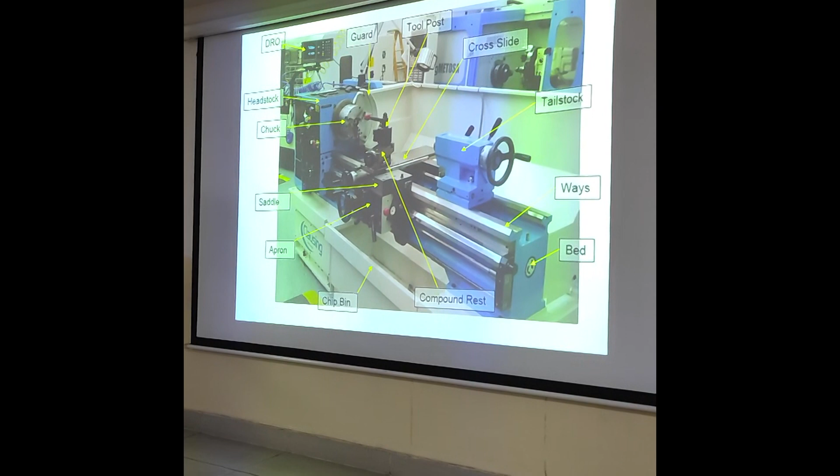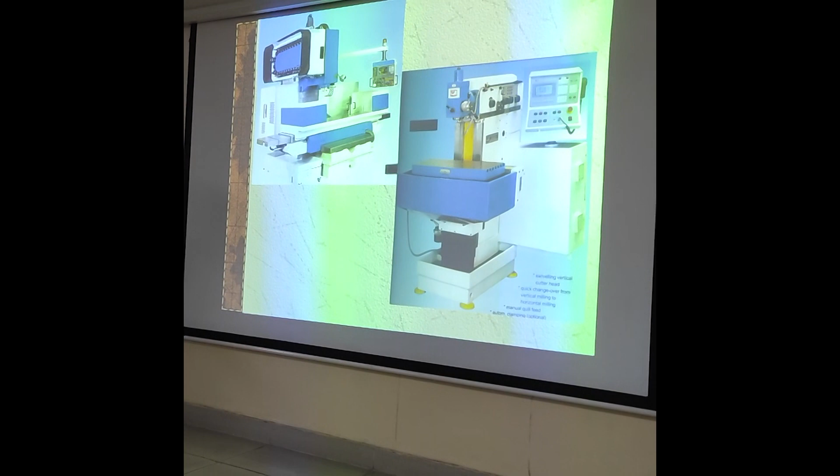So these are the CNC machine tools which came into existence for more precise and accurate manufacturing, which can be controlled through programming. That was CNC lathe, and this is CNC milling machine, which is known as machining centers, right? So these machine tools are required for the purpose of manufacturing, for removing unwanted material and then manufacture.

Then once the operation has been completed, the machine will stop. You will take the component and load it into the next machine. That will run as per the CNC programming. The process continues. And at the end, you're going to get a finished product or a semi-finished product.

Okay. So here, this is the point of concern, right? The activity which has been done by human operator will be carried out by some man-made mechanical system, which we call as industrial robot. So this is the place where the concept of robotics came into existence in the industry.

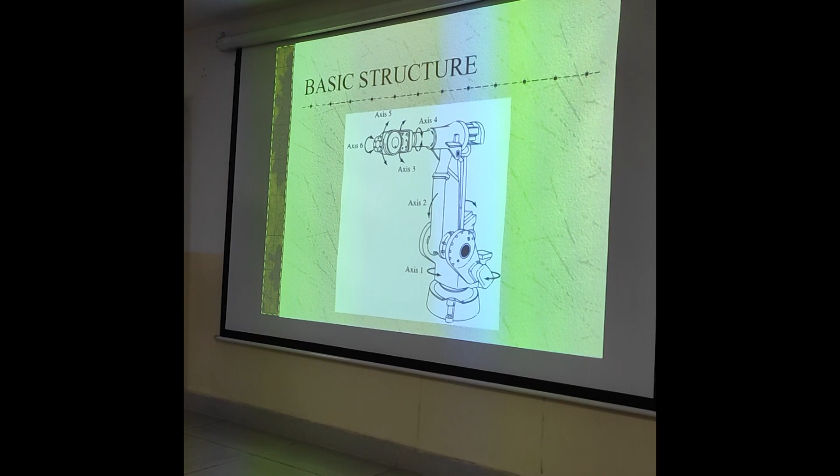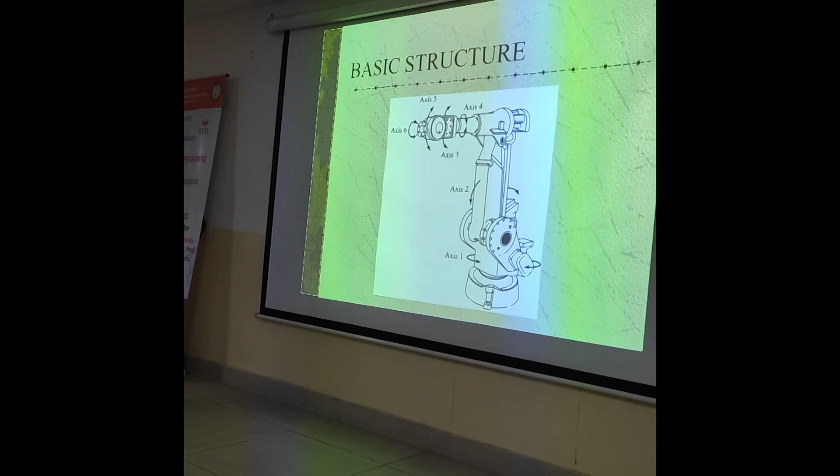Okay. This is one of the basic structures of an industrial robot, which is very widely used in industry, which is known as articulated joint robot or jointed arm robot, which is an imitation of the human. There's a body, there will be upper arm, there will be lower arm, and then there will be hand. So that you can make out in this one, right? And it has got different degrees of freedom of motion, right?

I made the mechanical system comprising of body, arm, and I provided the joint. I've given the drive system. Through computer, I'm going to give the control signal for its motion, right? These robots have to perform something in the industry, okay? So now this needs to move.

So if it has to move, then you have to provide joint, and each joint is going to give 1 degree of freedom of motion. In this one, if I provide a rotary joint at my base, I can rotate my body. That is 1 degree of freedom of motion, with which the rest of the thing can have an access anywhere here. So one joint there at the base, if it is a rotary joint, then you can have a rotary motion, 1 degree of freedom of motion.

Then from the body to upper arm, there's another joint which can give this kind of a motion, right? This is another joint, now 2 degrees of freedom of motion. Now from upper arm to lower arm, I've got another joint. So 3 degrees of freedom of motion. Otherwise you can't execute any task.

And finally, to the hand of the robot, it has got 3 degrees of freedom of motion. You can make it rotate like this, which is known as roll motion. You can make it move like this, which is known as pitch motion. And you can make it move like this, which is known as yaw motion. So what to do with this one?

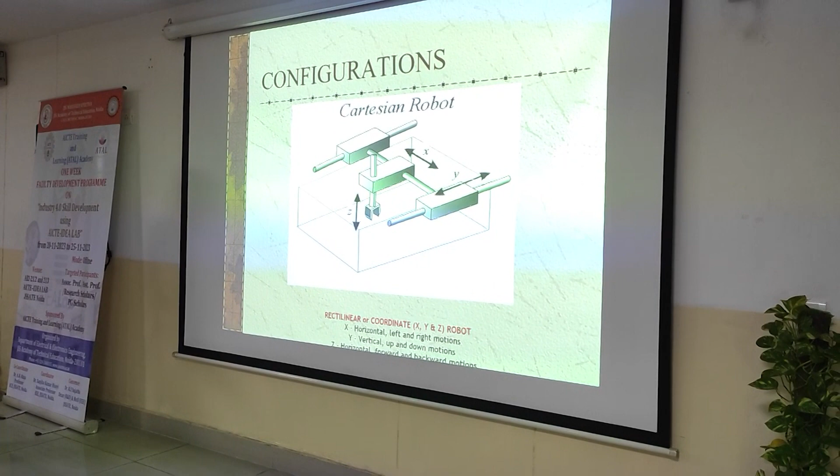So that's why the structure is comprised of a series of links and joints with different degrees of freedom of motion, which helps in the most important thing, positioning and orientation of the hand of the robot to execute the task. Now these are the various types of joints. It can be a rotary joint, it can be a linear joint, depending upon the application areas, right? And there are varieties of industrial robots, and the classification also goes accordingly.

And one of the major classifications is based on the physical structure or physical configuration of the robot. So there are four varieties. One is known as Cartesian coordinate robot. In this case, there are no rotary joints. All of them are linear joints. You've got orthogonal slides which you can make out here, orthogonal slides which are perpendicular to each other. And we have got three arm and body joints which are linear joints having linear motion.

With that, what we can expect is about the workspace within which it can function. If you have a Cartesian coordinate robot, 3-axis, you can make the hand of the robot move in a cuboidal workspace. The work region within which you function is in the shape of a cuboid.

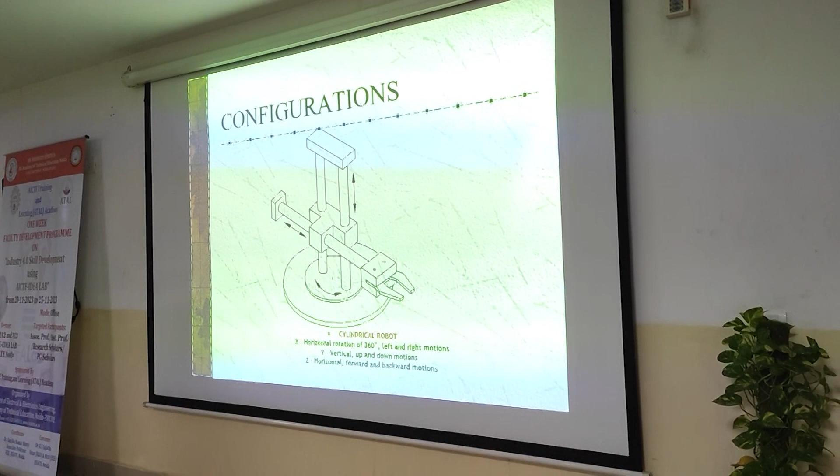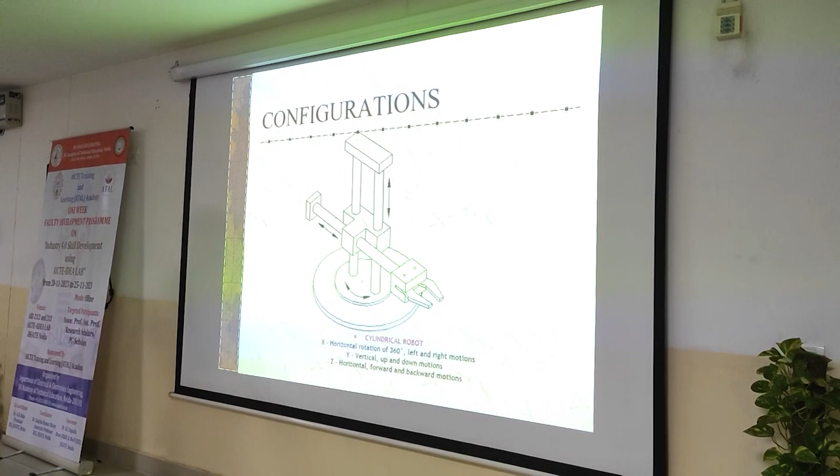Then we have cylindrical coordinate robot, wherein I've got two linear joints. This is linear and this is linear, and this one is rotary. So two linear joints, two linear motions, one rotary joint, one rotary motion. With this, what can you achieve? You can achieve a workspace which is cylindrical. It all depends on the industry application. You may need a cuboid workspace, you may need a cylindrical workspace, or some other kind. So that's why these classifications, these varieties of robot came into existence.

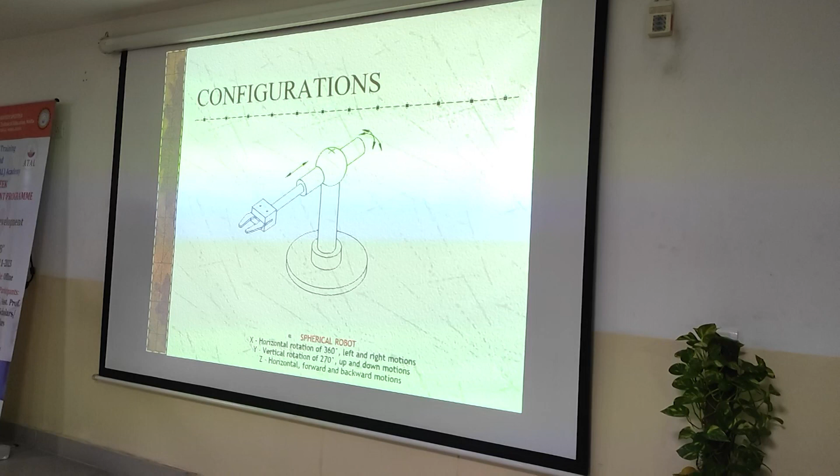This is known as polar coordinate robot. It's been pivoted here. It has got two rotary joints. One is vertical traverse, another is rotation traverse. Then you can make the hand of the robot move in and out, which is known as radial traverse. So if you imagine the workspace within which it can function, it looks like a part of a sphere, or a quasi sphere, right?

Then the most versatile one, the one which I showed earlier also, is known as articulated joint robot or jointed arm robot, in which all 3 degrees of freedom of motion associated with the arm and body are rotary in nature. Now again, the work volume is part of a sphere, a quasi sphere, with more versatility.

What I mean by versatility is, as a human operator, if I want to access this particular component which is in this position and orientation, with this articulated joint robot, I can hold it something like this. The same object I can hold like this also. This kind of flexibility is there with this configuration, which is known as articulated joint robot.

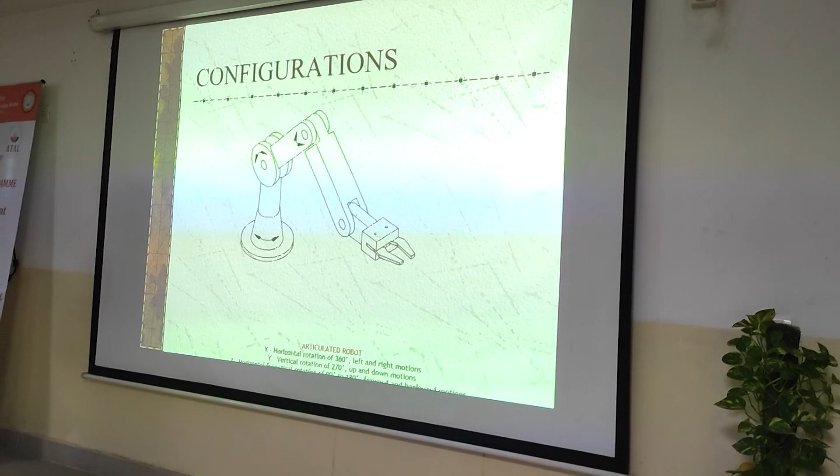Right? So, friends, with this, what I brought to your notice is that when we are talking about robotics, we are talking about industrial robotics, which has direct impact on Industry 4.0 and other things. And in industry also we have got various application areas, and that is where, depending upon the work region in which it has to function and the flexibility that is required in an industrial robot, we have got these 4 varieties of industrial robot. And most of the industry uses the last variety, which is known as the articulated joint robot.

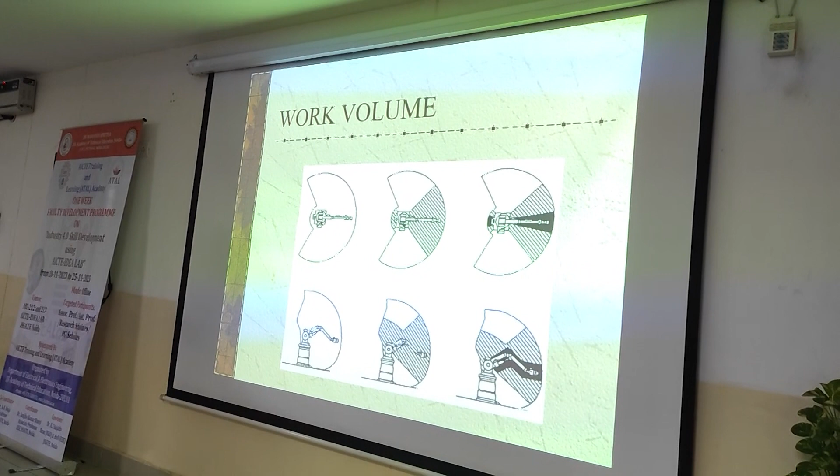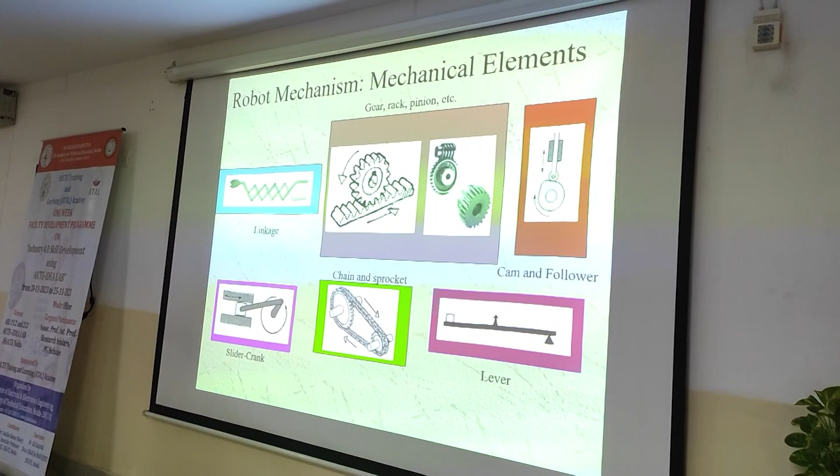Now this is the work volume, right? For Cartesian it is cuboid, then it is cylindrical. This is what I was talking about, quasi sphere, right? Then for the articulated joint robot, a 3D picture cannot be given, so that's why an orthographic projection has been given for depicting the work volume. All this versatility has been brought in this workspace. Fine. So these are the various mechanical elements which are used for giving and transferring the motion.

So when you are writing the program for this purpose, what kind of information needs to be given? That is the position and orientation information. So here in robot kinematics, we come out with a mathematical expression for positioning and orienting the hand of the robot in the three-dimensional workspace. So what kind of mathematical expression are we giving here? We use a very simple 4x4 matrix for defining the position and orientation of the end effector.

So here, when you are dealing with robot kinematics, many of the students are doing several projects in this, right? So they also need to learn this. Because ultimately even unmanned aerial vehicles are moving in the three-dimensional workspace, right? They need to be properly positioned and properly oriented. What is the concept behind that? Even the recent launch of Chandrayaan, right? It needs to be positioned at the desired location and it needs to be oriented. So there is some kinematics aspect involved in that, and those fundamentals come from robot kinematics.

So from an industrial robot perspective, there are two approaches of robot kinematics. One is known as forward kinematics and another is known as inverse kinematics. Forward kinematics: I know the joint angles. Means I know how much this joint needs to be rotated, how much this should be rotated, how much this should be rotated. I have prior information of the joint angles. Knowing the joint angles, I need to determine the position and orientation in the three-dimensional workspace. If you are dealing with problems of this nature, it is known as forward kinematics.

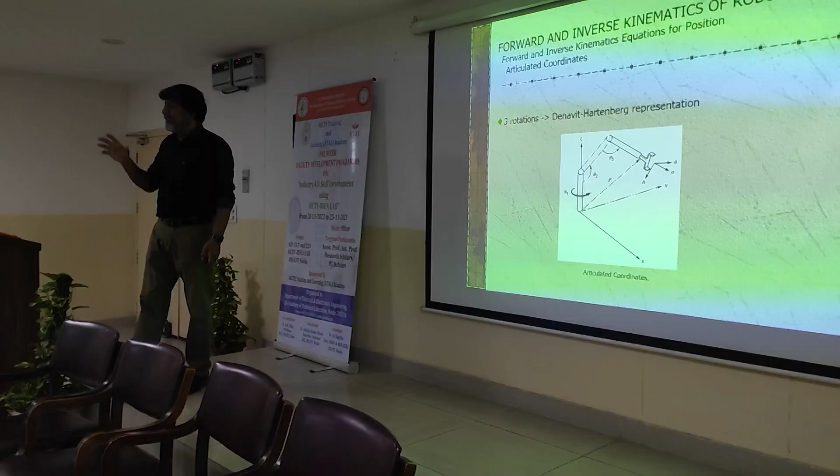Now I'm focusing only on a series of links and joints. Name the links and joints and then come out with a combined transformation matrix for executing the transformation from one joint to the next, from the ith joint to the i plus 1th joint. If you use that for n number of links and joints, you get the total combined transformation. That's very essential in many application areas, not only in industrial robots. So that's why this concept has been given.

I brought this information here because understanding the conventional DH matrix is very essential if you're working in the field of robotics. It's a very simple concept. They fixed the coordinate system with a particular convention and then executed the transformation. Very simple. I can't go into detail about that; it would be boring for you. So with the previous combined transformation, I had the position of the end effector in the three-dimensional workspace for Cartesian